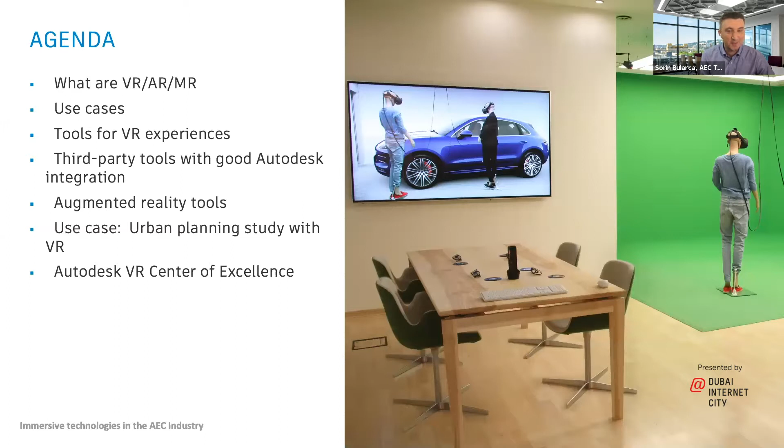So let's get started. If you aren't familiar with Autodesk, I'll give a quick introduction. We make software and tools that help our customers design and make anything, from skyscrapers and building components to bridges and blockbuster movies or video games. We have more than 9,000 employees worldwide and more than 80 million active users of our software. Many of our customers are like you - architects, engineers, contractors, project managers, and others in the AEC sector - but we also support other industries like manufacturing and media and entertainment.

We started basically 38 years ago, when AutoCAD was first released - it's one of the oldest software on the market, by the way. We are now in a position to offer more than 150 tools to our customers. So we're in a privileged position as a software provider, where we have access to expertise from all these industries, allowing us to blend these technologies together.

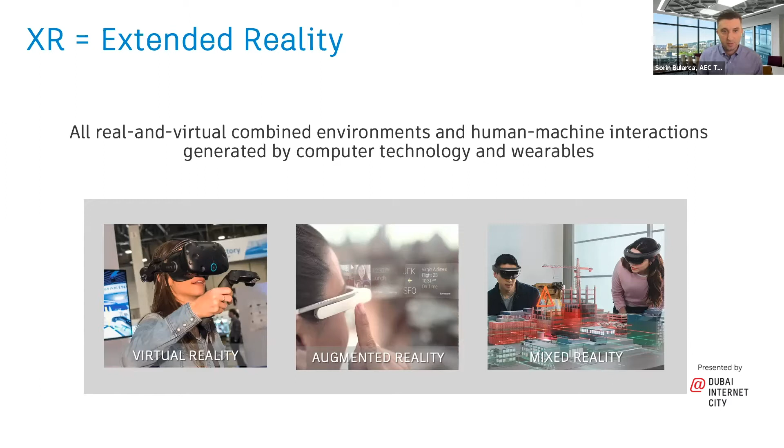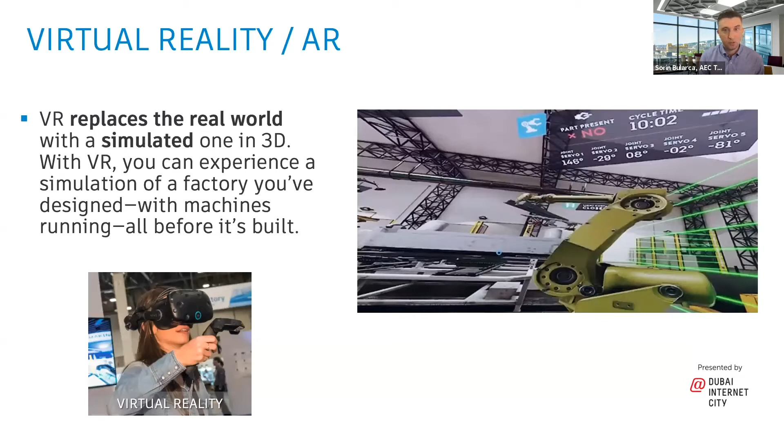Quick definitions of these technologies. First, virtual reality replaces the real world with a simulated one in 3D, and you can immerse yourself in this world using VR devices, interacting with these environments. Augmented reality, or AR, adds digital elements to the real world - it combines reality with a digital world, it augments reality, that's why it's called that. And we have mixed reality, which is a hybrid of virtual reality and augmented reality. Mixed reality allows you to touch an object from the real world while at the same time controlling something in the digital model.

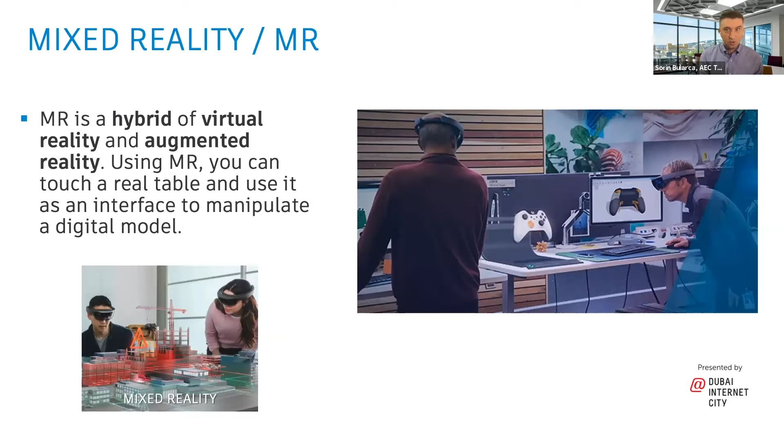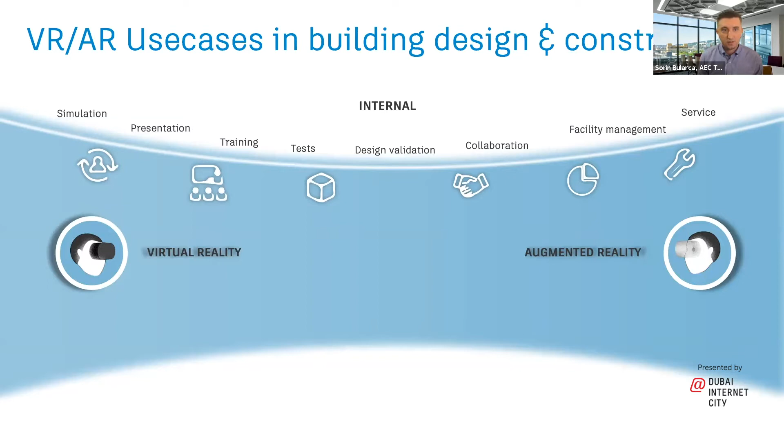There's a lot of applications and use cases for these technologies, specifically in the building design and construction industry. We have internal use cases like testing, design validation and review, collaboration, simulations and presentations. But we also have external use cases - you can present the architectural design in a more immersive way, for marketing purposes, for sales, product integration, and even for user support. I'll actually show you some of these examples.

Now, what do you need to do if you want to adopt this in your office? What tools do you need? The first thing you need is a 3D model, which can be done with hundreds of software. At Autodesk, we have more than 150 software, but specifically for AEC users, we have a product called AEC Collection, which includes 25 software that you can use for modeling, and even capabilities for VR.

These are all available with one single subscription. We want to make things easier for our customers and enable them with all the tools they need from one single source. You also need a gaming engine, and this is available from Autodesk - it's called 3ds Max Interactive, part of our 3ds Max software.

It's a plugin called 3ds Max Interactive. You can also use third-party partners of Autodesk like Unity and Unreal, which are very famous game engines. You will also need a VR-ready PC and a VR set, and HTC can help you choose the best headset required for your use case.

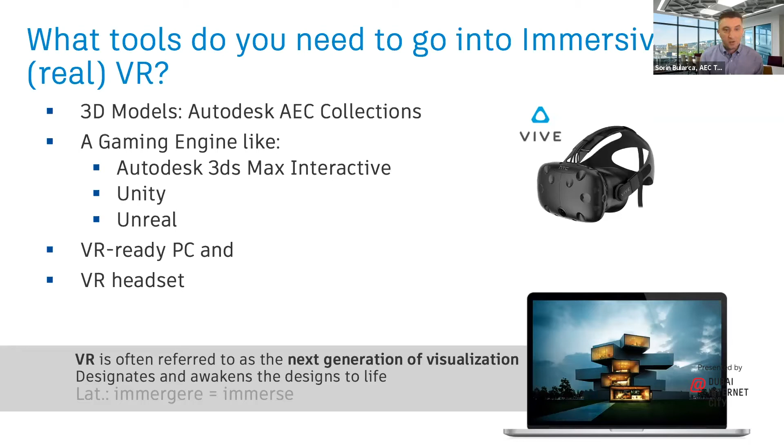VR is often referred to as the next generation of visualization. Here I'm showing you an example of a VR experience from a BIM model made in Revit. This model was brought into our 3ds Max software.

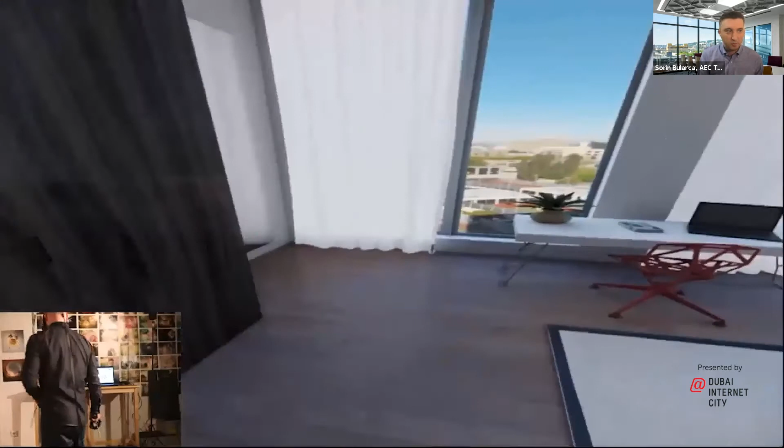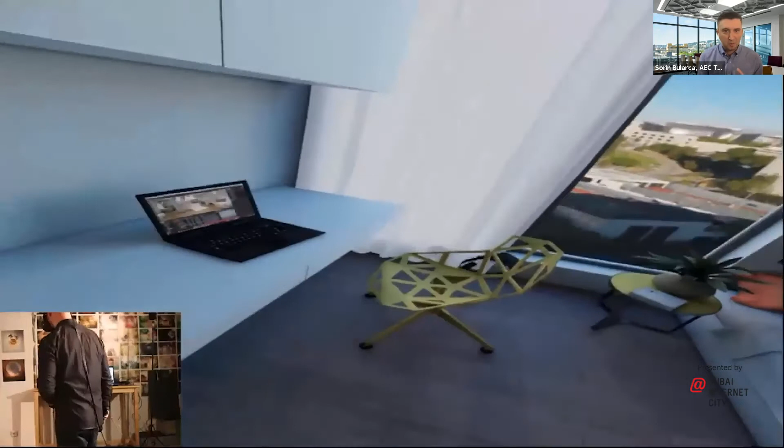With the 3ds Max Interactive plugin, this VR interaction was made possible, so you have the possibility of immersing yourself in the design. You have a laser beam or teleporter which can help you navigate through the building itself. It's a much more interactive and meaningful way to present your designs to your customer instead of just showing a 2D drawing with some perspective views. Technology nowadays enables this.

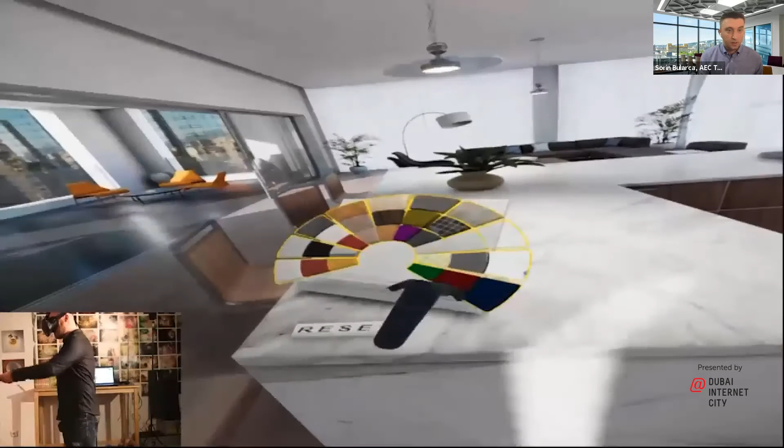As you can see, now it's accessible, and you can easily turn to these tools and adopt them. You can also have the possibility of changing your design.

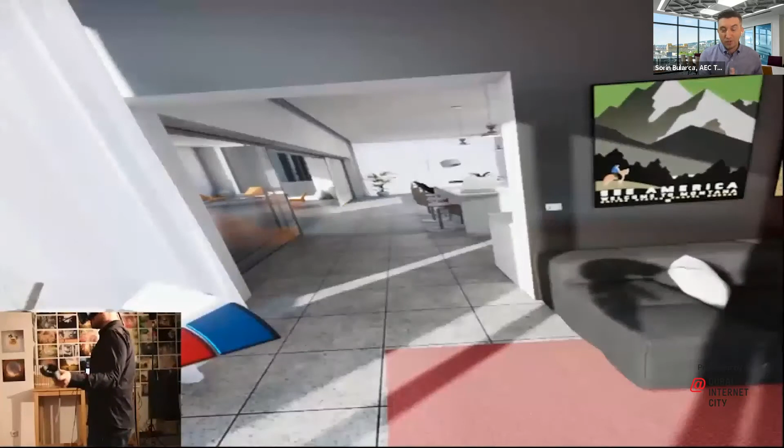So you can create these immersive interactions with your models, where you can point the laser beam to a wall. You can choose a material from a library that you can provide to your customers, and then very easily change the material. So you can change design options without having to learn Revit, or without having to go back to the design board and change the model itself. It makes it more fun, I would say, and it's much more flexible and gives more possibilities for the customers.

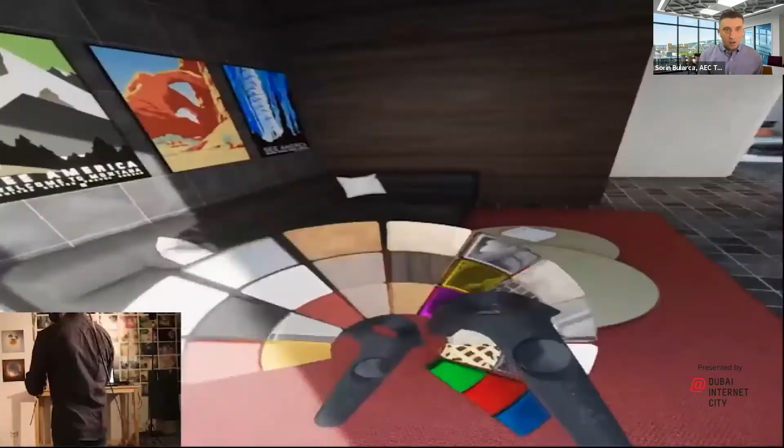Now, if we talk about tools for creating these VR scenes, as I mentioned, we need tools to create the 3D model, and then we need tools to animate that model and create these interactions.

One of our main tools for this is, as I mentioned, 3ds Max Interactive. It's a game engine initially developed for the gaming industry, acquired by Autodesk, and now built into 3ds Max software. It supports very good interoperability with 3ds Max itself, and also with Revit and our other architectural tools.

We also have a premium software for VR called Autodesk VRED. It's mostly used by the automotive industry, and it has very high quality rendering required by that industry. It also requires the highest hardware specification, and the price is much higher than, for example, 3ds Max.

And you have Unreal and Unity, the game engines we have partnerships with, with better and better integrations each year. They have plugins, and I will show you some of these third-party tools that have very good integrations.

Just a quick view on these, to give you an idea of what these tools can do. First one is Unity Reflect. This is Revit, our architectural software. With one push of a button, you can send your Revit model to Unity Reflect.

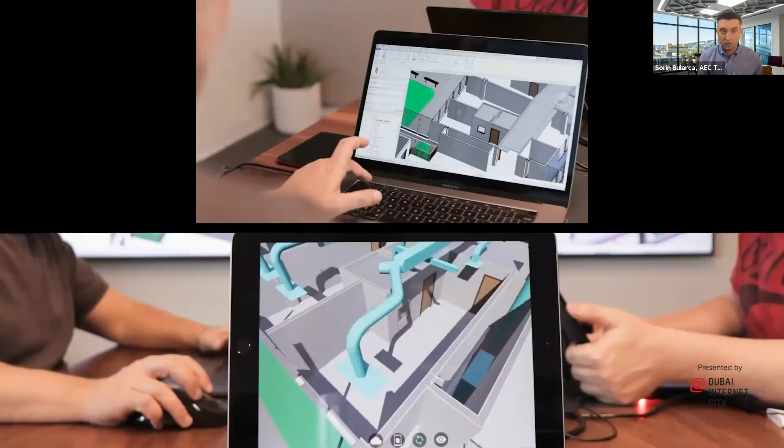It's very good for reviewing your model. From a customer's or project lead's perspective, who don't have time to learn Revit or change all the settings, they can visualize changes in Revit in real time in a VR environment with Unity Reflect. Another very popular one is Enscape for Revit.

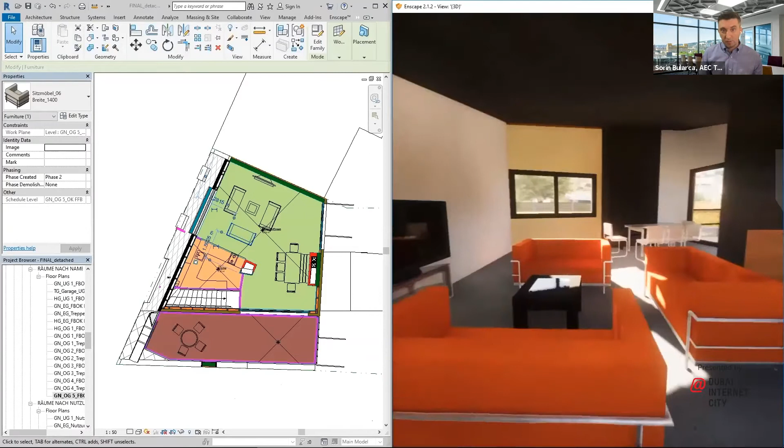Its functionality is a bit similar to Unity Reflect. On the left side we have Revit, on the right side we have the rendering in Enscape. So you change some furniture in Revit, and you can see it in render mode instantly.

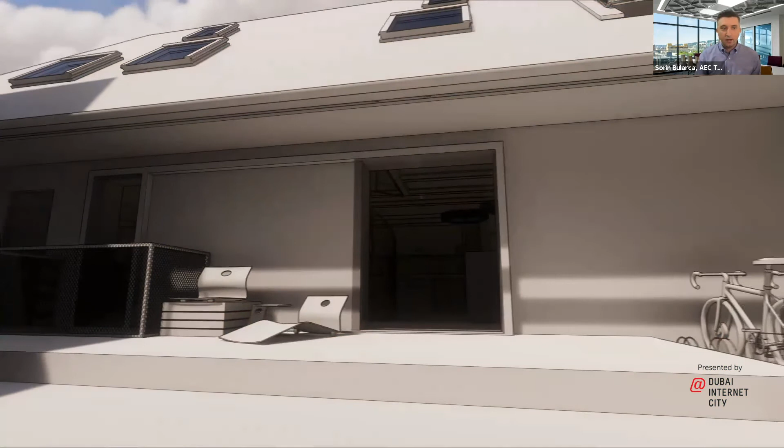You can also activate VR mode and quickly switch between exterior and interior modes, navigating and reviewing the project. Again, you have controllers which allow you to point your laser and easily navigate through the model. You can take snapshots and capture different angles and cameras.

That's Enscape. The Wild is another application. It's very well integrated with our BIM 360, which is our cloud software supporting different architectural models and file formats that can be converted, shared, and collaborated on.

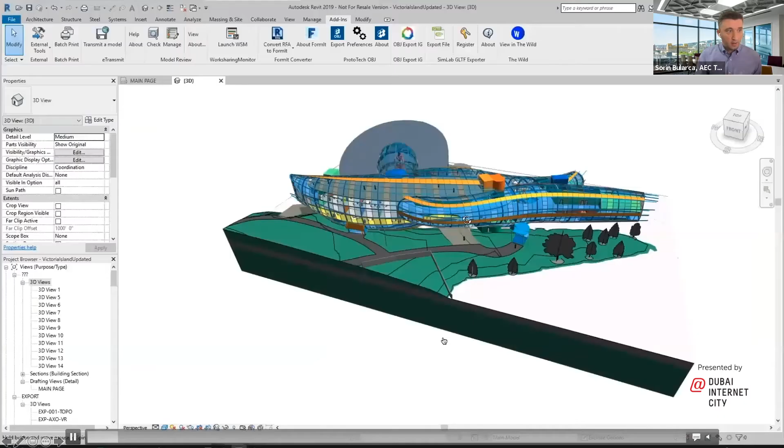They have this plugin that allows you to interact, create live meetings and reviews, and even make changes in your design. So this is a snapshot of this. You have Revit, then you install the plugin, you click on the plugin itself, and it brings you into the virtual world.

The nice thing is you can even see your peers in there, and see the models from different hardware perspectives. Somebody can be connected using the VR headset, others can be connected just using their tablets. This is an example of how you can do a modern, 2020-style project review.

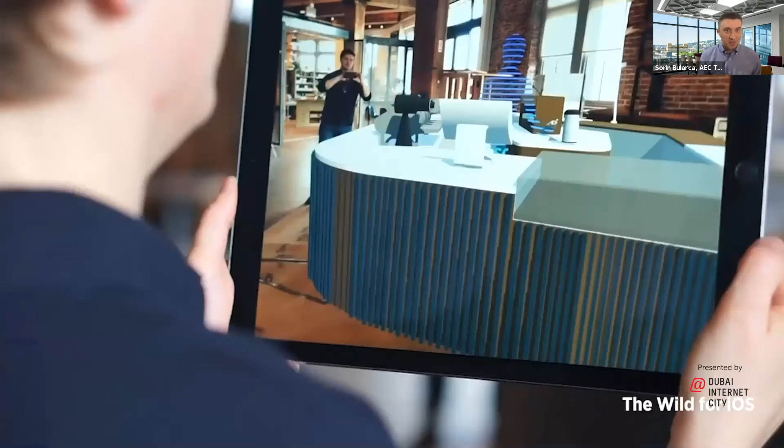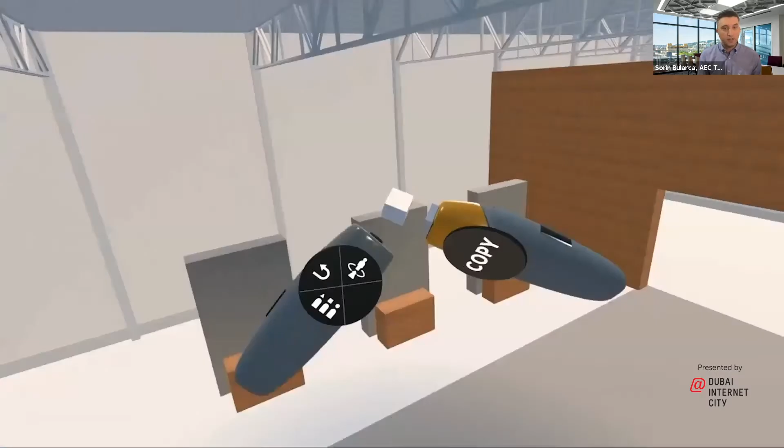Now it's also a difficult year because we are socially distanced, so this kind of technology can help us break these barriers and restrictions. It's a very good tool with a lot of potential for project review, and you can even use it to create and manipulate geometry. In this example, you have some triggers that allow you to interact with the objects, and you can even create conceptual design in VR environments.

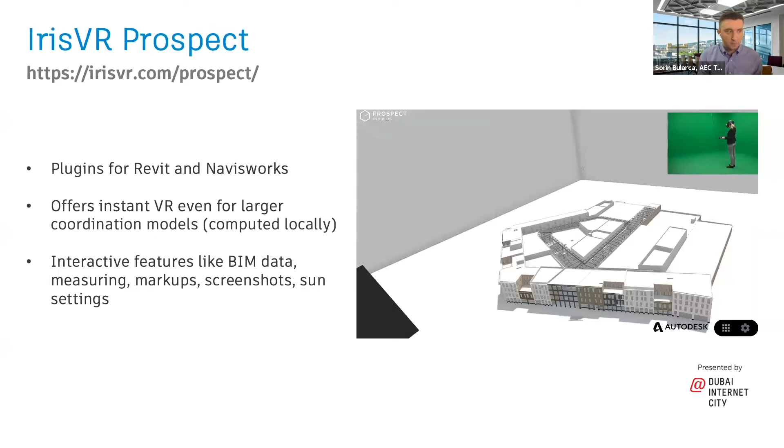IrisVR, another nice application. I think you got the idea, it's basically similar functionality. You can experience the model at a small scale, like a small scale version of it.

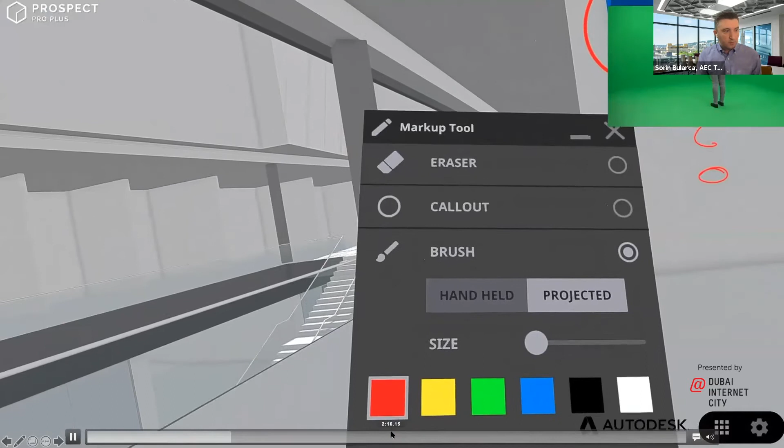But you can even go into real mode and start to navigate, start to review it. So you have tools that enable you to do redlining. It allows you to capture different views, so you can save those cameras, and next time you enter, you can immediately switch between different angles.

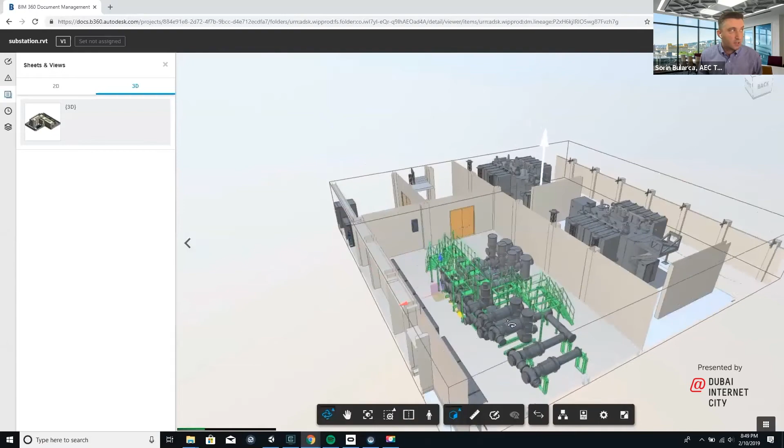Last one from this is InsiteVR, again very well integrated with our BIM 360 platform, and it allows you to connect and co-work on the same Revit models at the same time. So you can basically build that geometry together with your peers, located in different offices around the world, using this InsiteVR plugin with a click of a button.

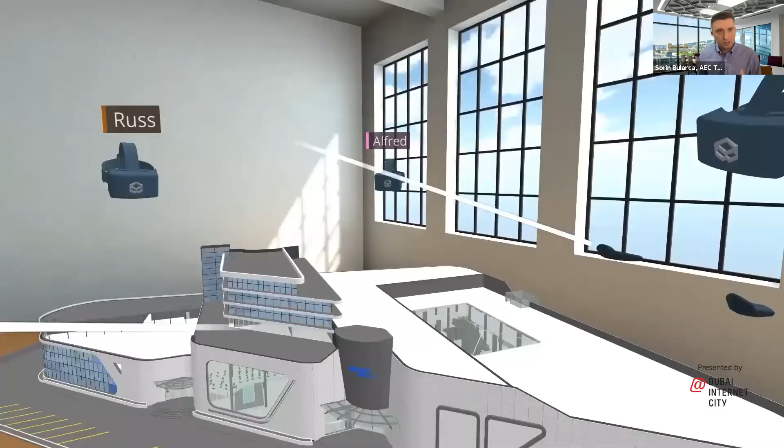You can go into VR mode, and again manipulate the small scale version of it. Or you can see your peers, see their headsets, and you have a lot of nice features that allow you to review this.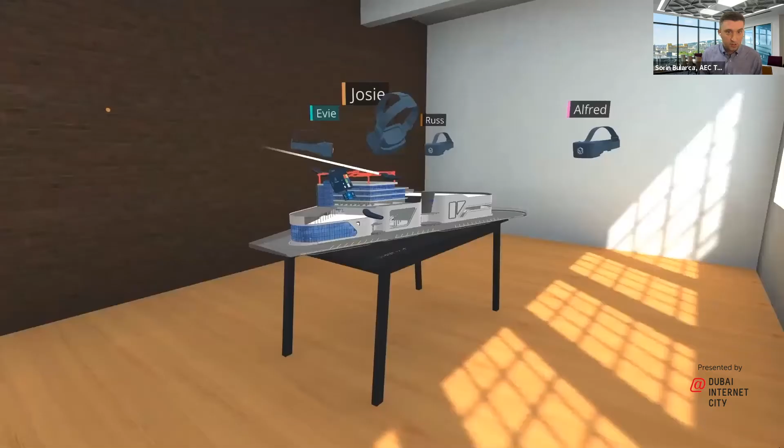And you can create issues. Issues can be assigned to somebody, and you can also track the work in your projects. You can see if the issue was solved, and the person will receive an email notification with the change that needs to be done. So it also solves this long collaboration and coordination problem that is there in the industry.

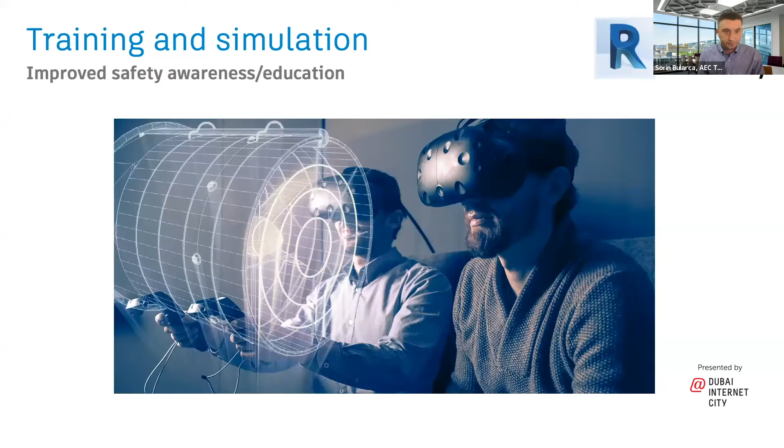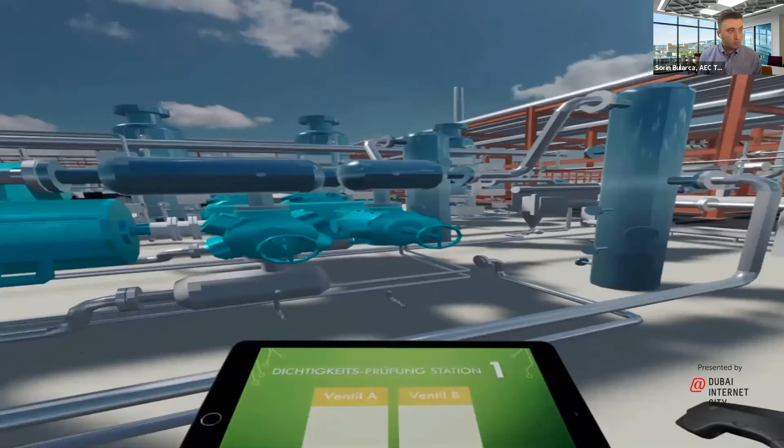Another important aspect is training and simulation, which can also be done with VR. The idea is that you can train your employees who will work in a factory before the factory or installation is finished. It's very relevant for the oil and gas industry. You have the BIM model ready, you can train them in VR, and by the time construction is done, they already know where the equipment is located and how to interact with it.

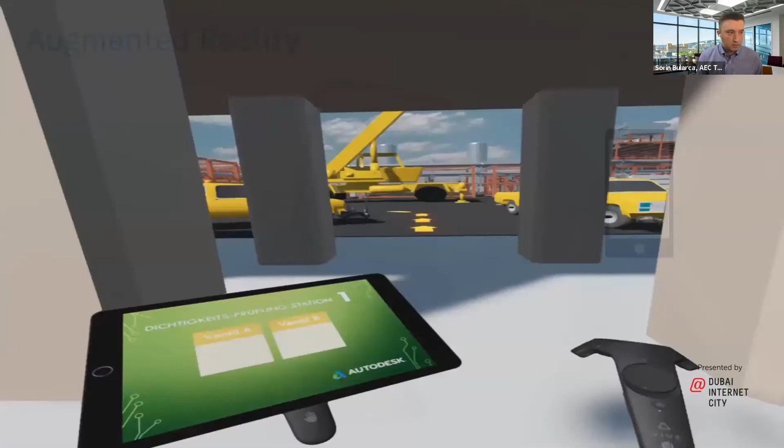I myself was involved in a project for a big power company in South Korea that needed to develop training in VR. They had a model ready, and we built all this VR interaction to train their staff and help them understand how to use the equipment. It's a very good example of how VR technology can be used to improve training and also reduce the time until the building becomes operable.

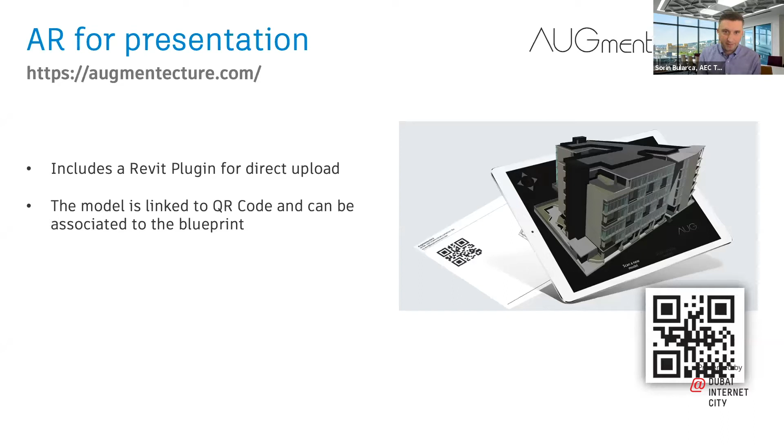Now, a few apps for AR, augmented reality. I've already shown what augmented reality is. We have a very simple one called Augmentecture. It basically allows you to put a QR code on your drawing. With a tablet, you can scan the QR code and see the BIM model on your tablet, so from 2D you can convert it to a 3D model.

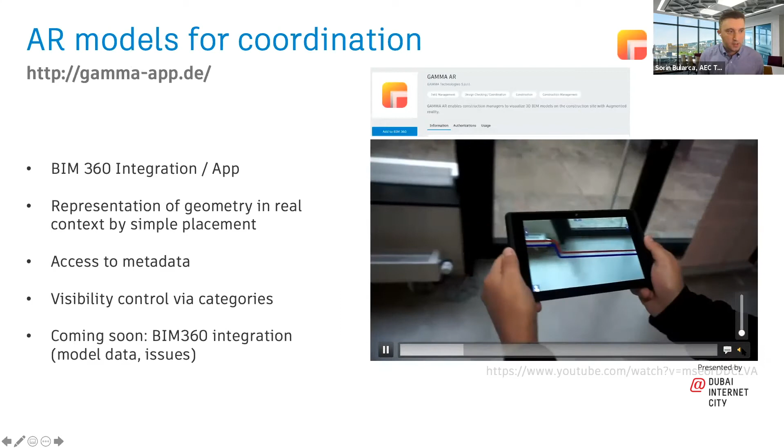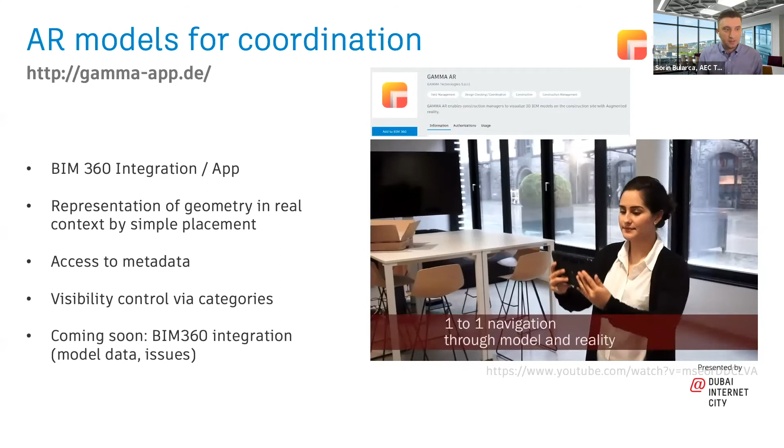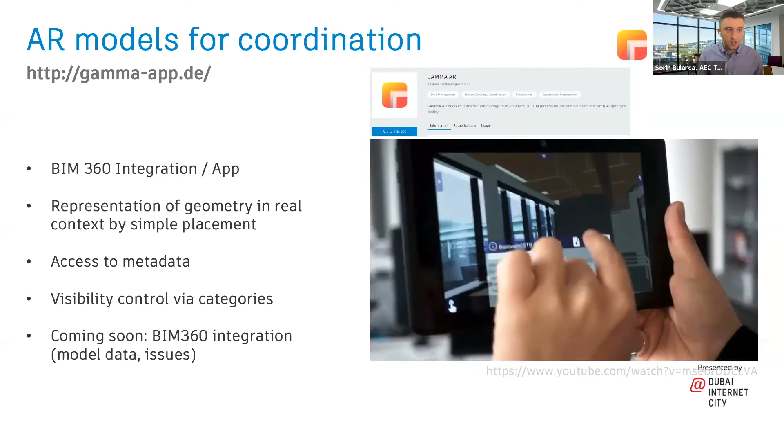We have this Gamma app. Gamma app basically overlays a digital model into the real world, combining the structure, if it's ready, with the MEP. This allows you to visualize all the ducting. It's good for operations and maintenance, you don't have to remove the ceiling to understand where your pipes are located. You can just use this kind of app to identify potential issues and where they are located.

So it's a very good example of that. We have HoloBuilder as well. This is more like... it's good for construction because you can do basically site inspection without having to go on site.

You can just send one person, that person can take 360 videos. Those 360 pictures can be synchronized with our BIM 360 Docs, which is our cloud collaboration platform. And you can create issues directly on the 360 images. Those issues, again, can be tracked and assigned.

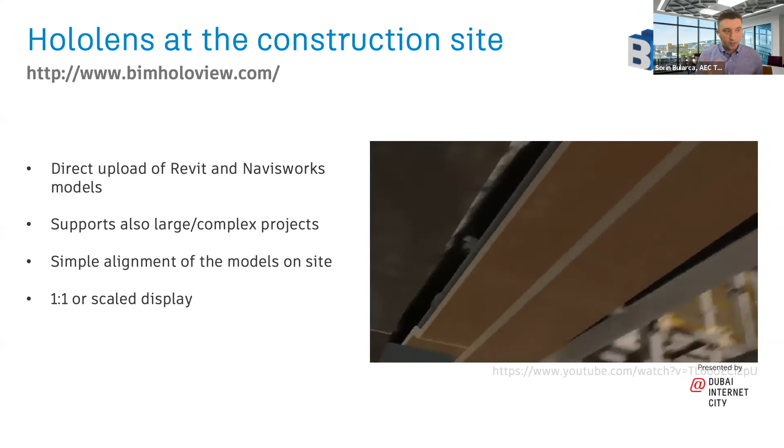And lastly, we have HoloView, BIM HoloView. It has direct connection with Revit and Navisworks, and it allows you to basically overlay the MEP works with the structure. So similar to the previous one that I was showing you.

Now I want to show you this urban planning case study for VR, done by the City of Paris in collaboration with Autodesk. They are planning to do a revamp of the downtown area, about 2.4 kilometers radius around the Eiffel Tower. This will be done for the 2024 Olympics. The idea was to create a BIM model, a digital version of downtown Paris, to enable architects and engineers to create new proposals in a much more modern, more efficient way.

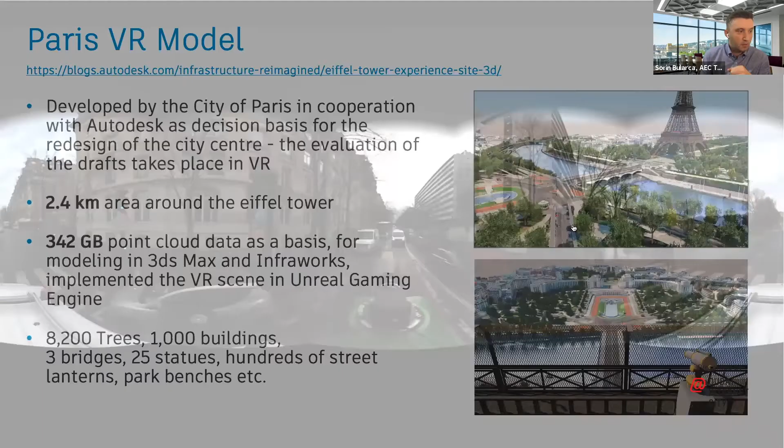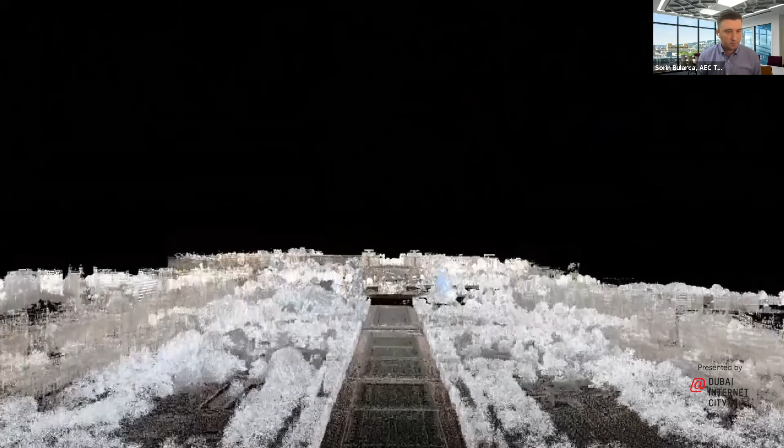First, there was a company that scanned the surroundings. They used mobile scanners mounted on cars, and drove on all the roads around the center of Paris. It generated more than 300 gigabytes of point cloud. These are some samples from the point cloud data that they used, and you can see this point cloud was shifted into our InfraWorks platform.

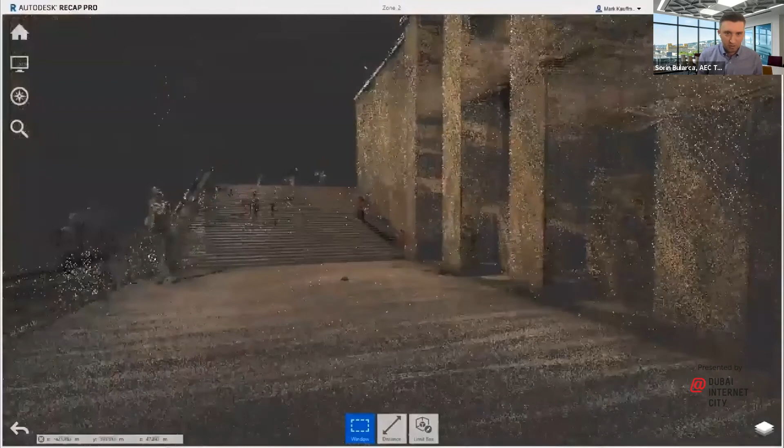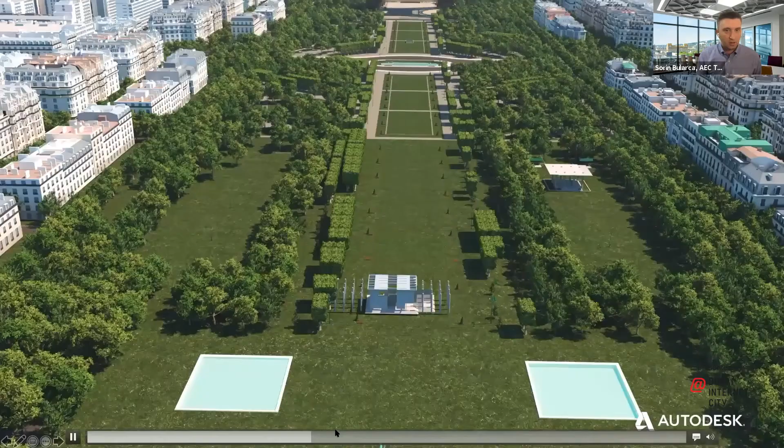So this was the process of creating this model. Of course, the buildings were done with modeling software like Revit, AutoCAD, different kinds of tools, so it was a combination of tools. This is the final BIM model, you can see the size of it. These are the combination of different platforms that were used for modeling and capturing existing reality - different kinds of technologies.

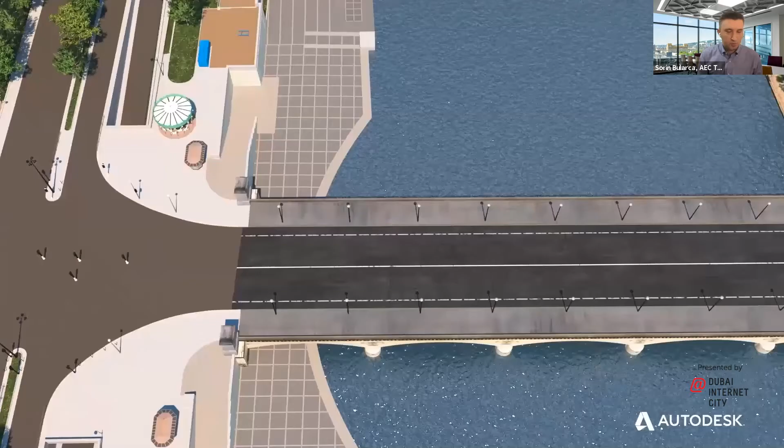I was mentioning about the trend of these technologies converging. I think this is one of the best examples that shows basically how these different tools can be connected, for a very good purpose.

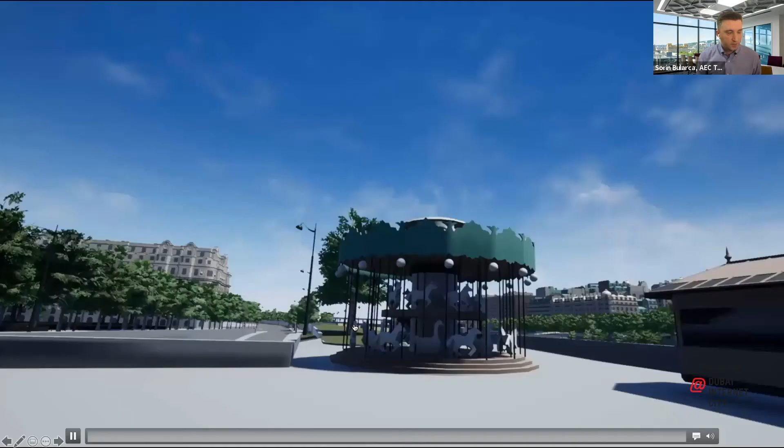And in the end, of course, the highlight of this was the VR model that was created. Basically, it allows you to visit Paris and interact with this model, you can teleport yourself. And by the way, this model is available for free, it's available to download, and if you have a VR set, you can use it to test.

A nice feature that I like - they even put daytime or nighttime modes. With the triggers, you can switch between different modes very easily, so you can have a feeling of how the tower looks in the nighttime or in the daytime.

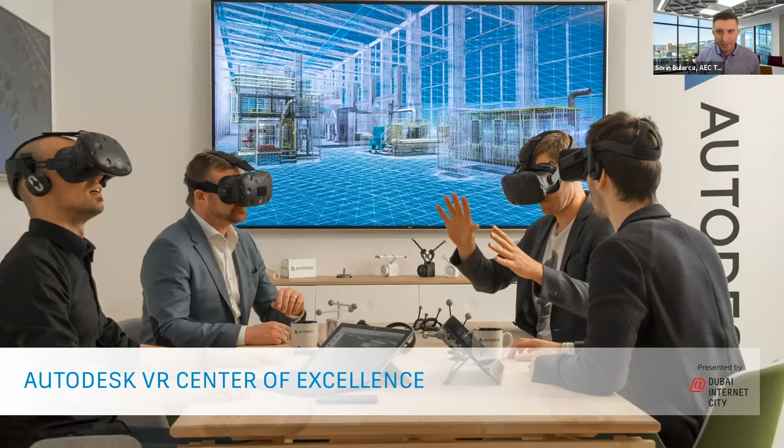And lastly, Autodesk VR Center of Excellence. Basically, this is our playground for VR. It's actually a center that we have built in our office in Munich, Germany. We also have a reduced version of that in our office here in Dubai, so we can also help customers understand how this technology can work. But here in Germany, we have invested in the best tools, best hardware, and it's a demo environment for our customers.

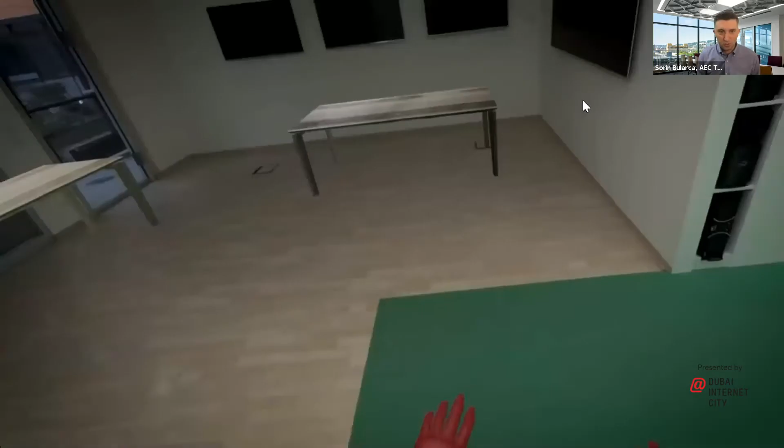I just want to show you a quick tour of it to understand what's possible to do there. Of course, there's a lot of car industry support there. Basically, we enable customers to bring their models, we can convert them into VR environments, and then they can interact and visualize these designs. They can even experience how to drive the car - it's a combination of VR.

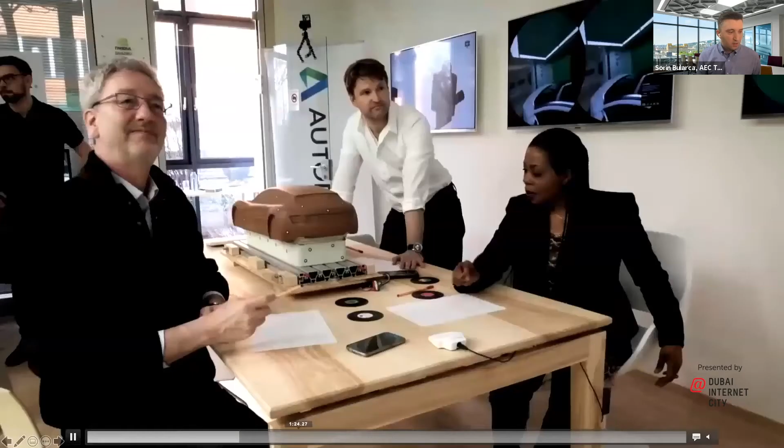It's a combination of mixed reality as well, because you can interact. This is an example where you have a real object that is tracked, that allows you to interact with a digital one. So you can slice your VR model using an object that is tracked in space. And you can start to move objects and furniture.

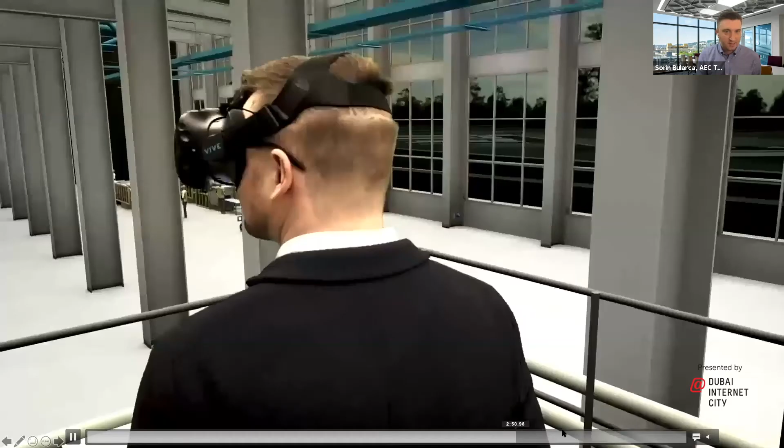It's a great way of showing how this technology works. It gives the best idea to the customers of how it is. VR is supposed to be experienced because this is the best way of understanding the potential of it.

I have some resources that I want to share with you. If you want to get started, I highly recommend area.autodesk.com. It's a very good source regarding 3ds Max and what's the latest, and it's our best resource for VR as well.

And we have Autodesk University. This is our largest event for the industry, for the AEC industry, where there are a lot of classes, free classes that you can attend from the past years, where you can learn how our customers basically use this technology.

So with this, I would like to conclude. As I have shown you in the past, let's say 20 minutes, more than just cool technologies, AR, VR, MR are changing how we design, create, and experience everything from factories, buildings, and cars to training, learning, and entertainment.

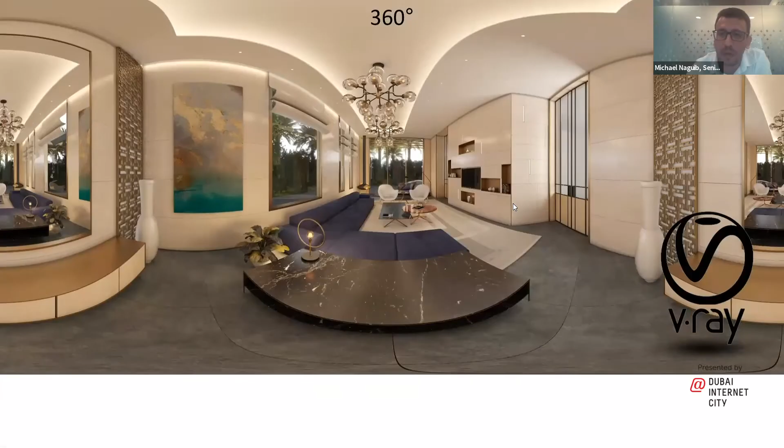Our journey started almost 4 years ago when we had the chance to visit Chaos Group, or V-Ray. I'm not sure if my camera is visible. Okay, so we had a chance to visit Chaos Group or V-Ray, and they introduced us to a new tool in their program, which is the 360 rendering.

And that's where we started learning about 360 stereoscopic rendering, which is a very simple classic technique to create an illusion of depth. Basically, you use two cameras, and the distance between these two cameras simulates the distance between the left and right eye. You might already know that if you close one eye and look with the other, you'll notice a slight difference between the images you see. That slight difference is actually the reason you can perceive depth, or see the image in 3D. Your brain does the magic.

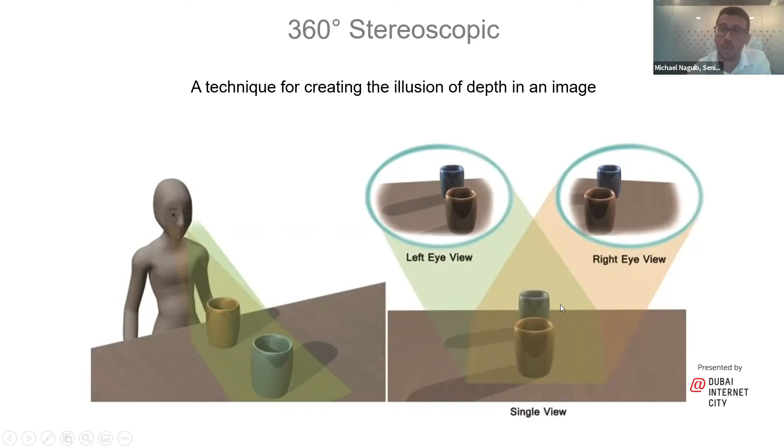And that was very interesting for us, to start using this technique and creating some kind of 3D visuals. It was static images, and back then we used the Samsung Gear VR. It was a very simple setup. You just render your image, your architectural building, place it inside your phone, and then put your phone inside the VR headset and look around.

And that put us on another challenge. We wanted to give a little bit more interactive solution to our clients. That's where we started planning or mapping our project with some hotspots, and then we allowed our clients to move or teleport from one spot to another using a simple click. Again, that was still a very good step forward, and our clients liked the idea.

Obviously, they didn't only use it for 3D rendering visuals, but also there were a lot of 360 cameras released in the market, which allow you to do this for real estate or for developers, just to visualize existing properties. That was really a very good step for us, and we were very happy about the result and the quality.

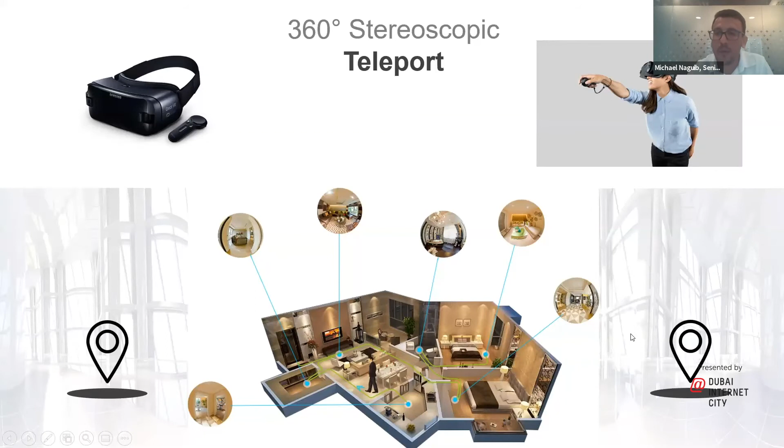But again, we were aiming for a more interactive environment. We wanted people to be able to engage, move, and actually pick up furniture. We wanted this kind of level of interactivity. And we thought that static images would never help us, simply because static images use conventional rendering engines, which allow you to create realistic materials.

But the process of having this realistic material sometimes takes hours. For example, rendering one project might take 1 hour, and this is the minimum. Sometimes it even takes more, and I'm sure architects or 3D artists are aware of that.

So we had to move to another rendering engine that allows us to render 90 frames per hour, which is 90 times the amount of frames we can get with conventional rendering. Can you believe that? Actually, I'm lying. We actually wanted to render 90 frames per minute. Actually, I'm still lying to you. We had to go all the way down to rendering 90 frames per second. And that was a huge challenge for us using the traditional or conventional rendering engine.

So we started investigating the market. Obviously there were few options, but we chose Unreal Engine. It's a kind of easy application to use. You can import all your 3D data, and then export it in an EXE format. This can be shared with your client anywhere. It's a format that can be used without any additional software, and that was very important for us, that we don't need a third-party program to open the files we share with our clients.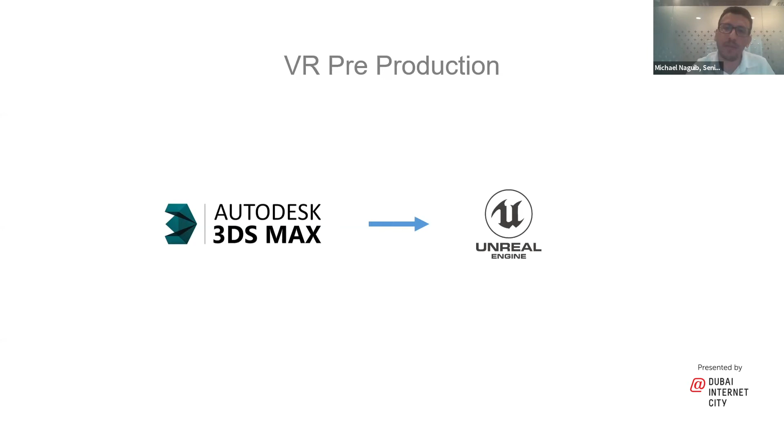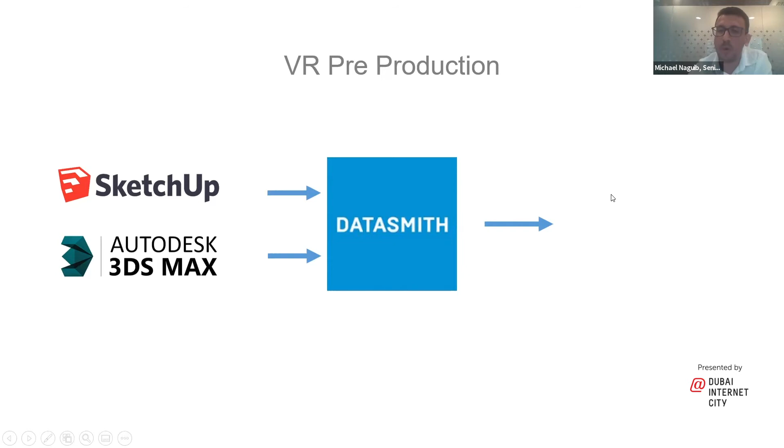So we started from there, and there was some production or pre-production required to build up our VR applications. Most architects or designers use Autodesk 3DS Max, and they usually export the model to Unreal Engine, and from there they start adding all the code or interfaces required for their design. But thanks to Unreal Engine, they looked into some challenges we were facing, for example material conversion, model accuracy, and model optimization, and created for us a plugin or tool that allows us to export from SketchUp or 3DS Max directly to Unreal Engine without any need of extra work. So that really saved a lot of time for us.

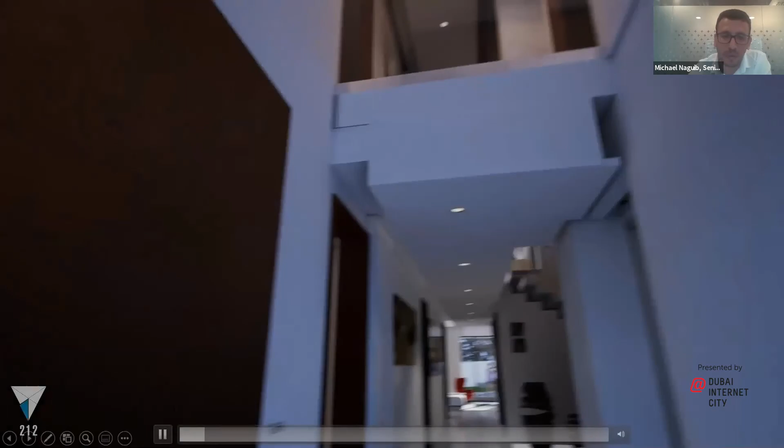I'm sharing now a sample project that we have done, and that was only a desktop application. In this application, you'll notice that we invested a lot of time looking into the details, looking into the material, and giving really the wow factor that we were looking for.

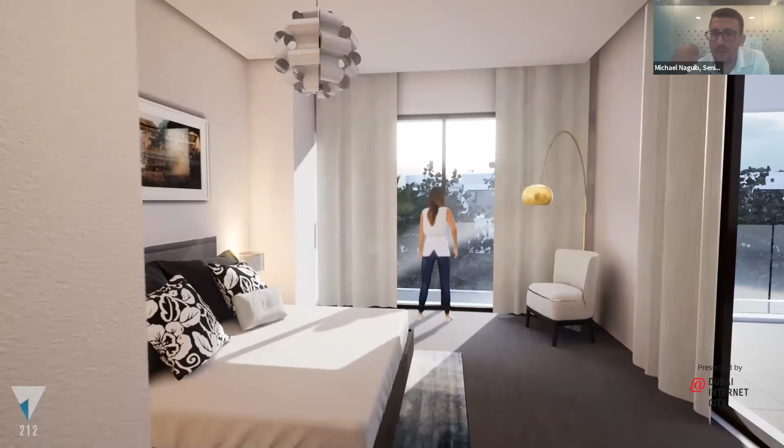So as simple as a video game, you just play the exe file, and then you can move around using the keyboard controllers. In order to add a bit more immersive experience, we started adding sound everywhere. For example, if you're passing by the TV, you can hear the sound from the TV. If you're close to birds or an outdoor environment, you start feeling the outdoor ambience, just to add a bit more detail.

So that was our first attempt to do a desktop application, and now we wanted to test it on a virtual reality headset. We chose HTC Vive, as we noticed the quality is really high, and also because it has very accurate motion sensors, which allow the user of the headset to freely move inside the virtual reality space, even with details like bending down and looking under the table. It's very easy and approachable using such a headset, and the resolution was very high and matched our expectations.

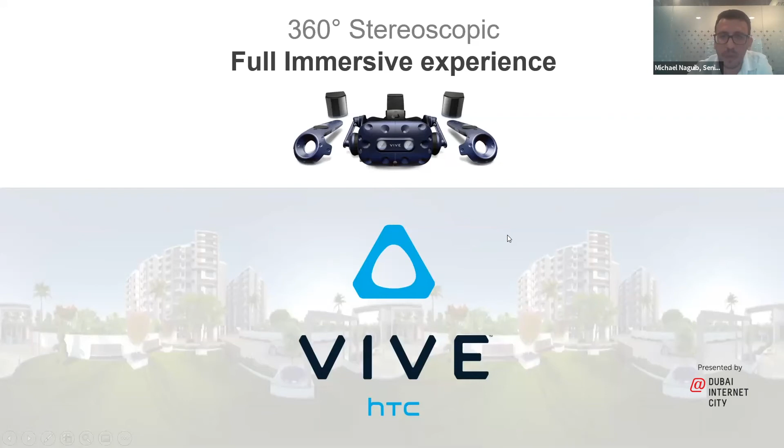So we went back before starting to create our projects. We wanted to know exactly what the clients need and how we want to communicate with our clients. Traditionally, we communicated with our clients as architects through 3 mediums: either we do animation, or we do rendering, or we submit a 3D physical model. I'm sure most architects or designers are familiar with these 3 mediums. But looking at virtual reality, we find that it opened for us the door to share much more tools, options, or benefits as a medium to communicate with our clients.

I'm going to show you some of these functions or tools that we have used. The first main advantage of using VR is the sense of scale. One of our clients, when we showed him the design of one of the architecture buildings, he spotted the canopy that he originally liked and had asked for, but when he saw it in VR, he said, oh, that looks a little bit bulky. He couldn't have made this comment if he couldn't see the real life scale. So VR was very unique in giving a sense of real scale to our clients.

The other thing we managed to build was an introduction or an animation, but in this scenario, instead of watching it on a flat screen, you are inside the animation. So the camera takes you from one space to another, and all you can do is just look around and enjoy the tour.

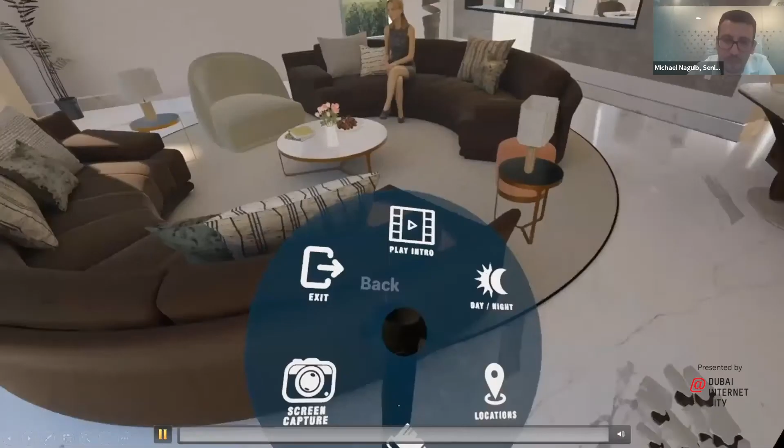As you see, it's an interior design project where we added interactive functions to some furniture, so you can move assets around and place them elsewhere. As usual you have teleport in hand, but you can also walk thanks to the motion sensor tracking system for VIVE.

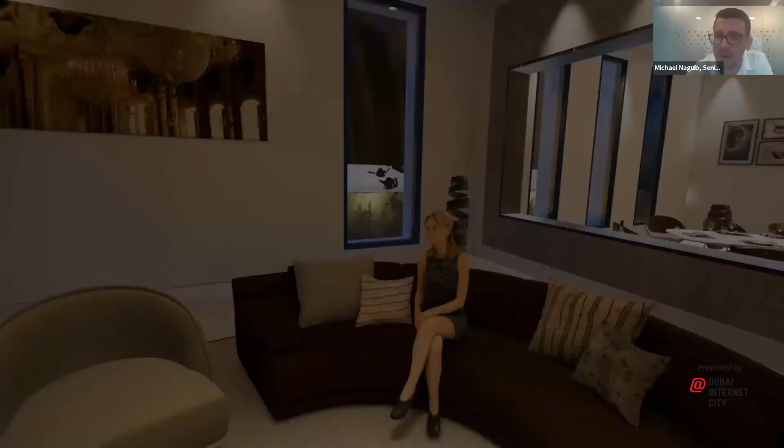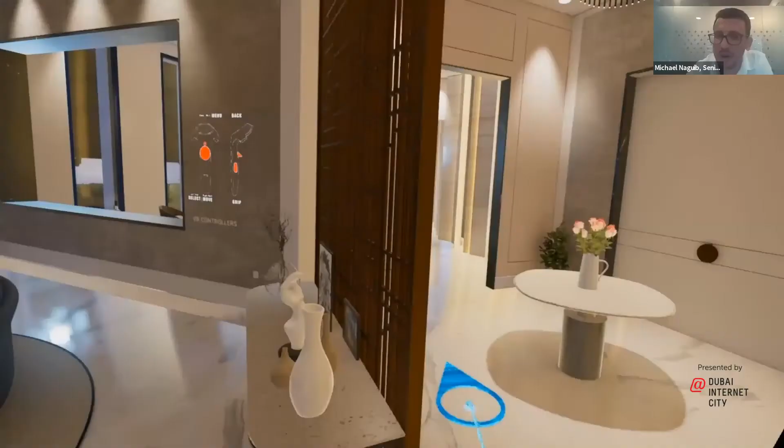Now you have all the functions in your hand, for example shuffling between day and night, and you can hear the ambience outside. That was very important for us, to give a full experience to our users.

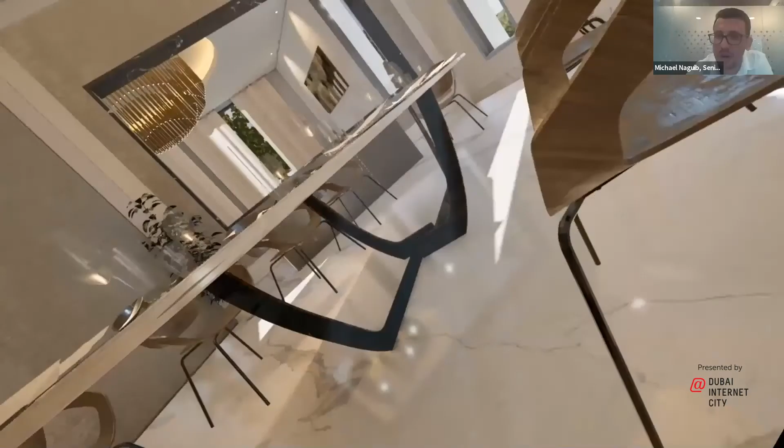Here the VR user will actually bend down and look below the table - that's the advantage of VR. You can freely move around and look inside your project.

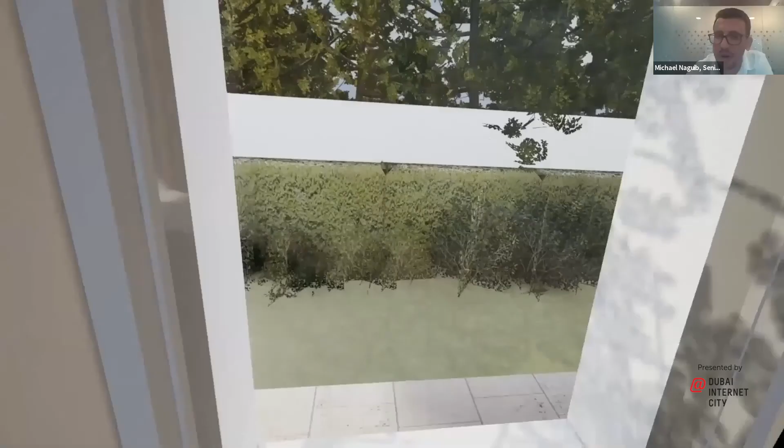You can see when I move closer to the window, I can hear the bird ambience.

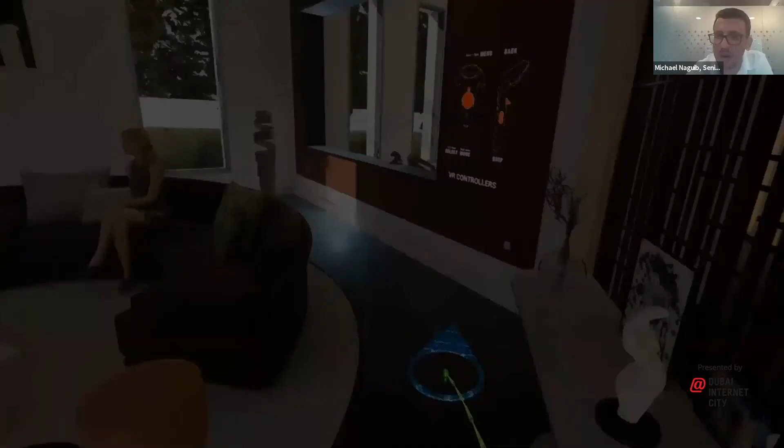Finally, I'm showing the teleport option which can take me from one space to another immediately, and here the function of changing materials - we can add an unlimited set of materials or finishes to propose or present to our client.

The final point I'd like to talk about is probably the misconception about virtual reality. A lot of people think that VR or any new technology is expensive, and I wanted to clarify that in my next few slides.

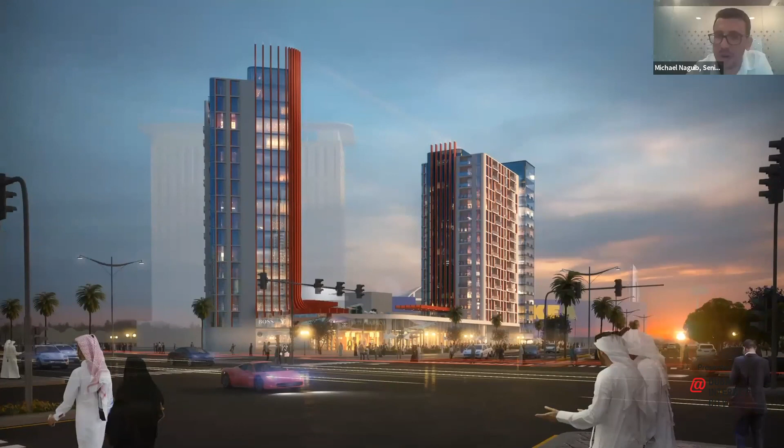We made a comparison between a render done in V-Ray and one done in Unreal Engine or virtual reality. The advantage of VR gives you much more than traditional rendering. For example, in 4 weeks with one machine and one person, you can get 4 renderings, a 1 minute animation, and 1 physical model. But with the same person using real-time rendering engine instead...

...you can get an unlimited number of screen captures because you have a fully baked model. You can also get up to 2 minutes of animation or more. But the best part is instead of a physical model, you get a real scale one-to-one model you can walk in. Of course design options and variations are important too, along with unlimited hotspots and day/night scenarios.

Surprisingly, this isn't even done in 4 weeks - we managed to get all these outputs in 3 weeks. So you can actually save money by using real-time rendering technology with virtual reality.

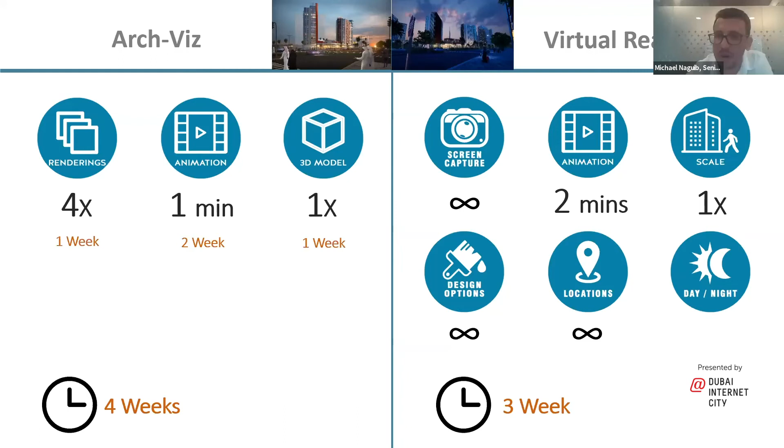That's my part. I hope I gave you some information and encouraged you to start your journey in immersive technology. I'll be happy to answer any questions. Thank you very much.

Very insightful conversation.

I like the fact that we've seen with Sorin the part related to Autodesk and how we were able to get things in perspective with you on a real application, how you managed from a business perspective, providing those VR experiences integrated already from an architecture and design software, and how we showcased at the end the value and the differentiation between both, which is very important when we as HTC VIVE talk to customers or ISVs who are willing to take this on board and see the challenges and how virtual reality can open many perspectives.